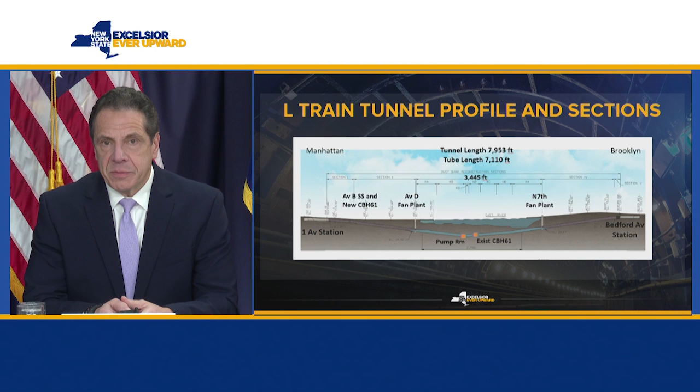The L train tunnel, as you know, it's about a mile and a half long. It's over 100 years old. It goes from First Avenue in Manhattan to the Bedford Station in Brooklyn. The tunnel goes from Manhattan to Brooklyn, 7,900 feet. The tunnel itself, 7,100 feet.

2012 Hurricane Sandy, which caused all of these issues. Gateway Tunnel, Hudson River Tunnels, Montague Tunnel, L Train Tunnel. What's the common denominator? It is the first time you had a tunnel that was filled with salt water. That does not happen. That has not happened. Queens Midtown Tunnel, Brooklyn Battery Tunnel, same thing. It's been an entirely new experience to have a tunnel filled with salt water. And that's what Hurricane Sandy did. And much of the reconstruction that we are now doing goes back to Hurricane Sandy.

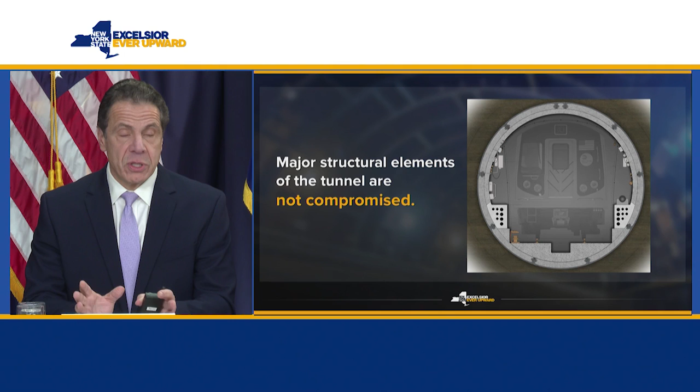The major structural elements of the tunnel are fine. There is no structural integrity issue for the tunnel itself. So people worry, is the tunnel going to have any significant issues? No. The structure of the tunnel is fine. The issue is the saltwater intrusion coming into the tunnel, which then made contact with the electrical components in the tunnel. And that is the problem. Salt water and electronics do not mix, period. It is a toxic combination.

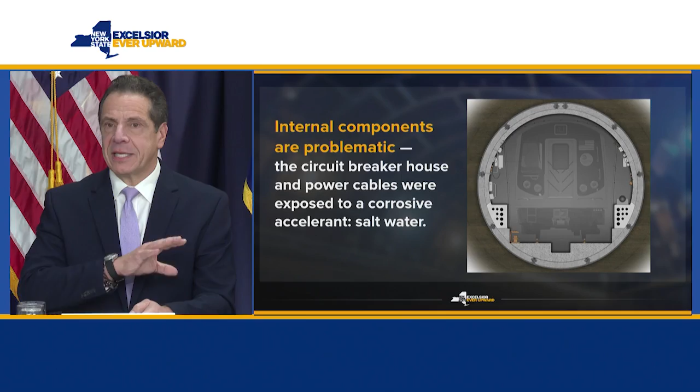And it's not that the water comes in and the water goes out and everything is fine and you dry it. The salt remains, and the salt remains in places where you can't get it out. So circuit breaker boxes and the power cables. You'll hear a lot about the power cables. The power cables are the cables that power the train. And they are very, very important. They were all exposed to salt water. That was an accelerant for the corrosion. That's what has created this entire situation.

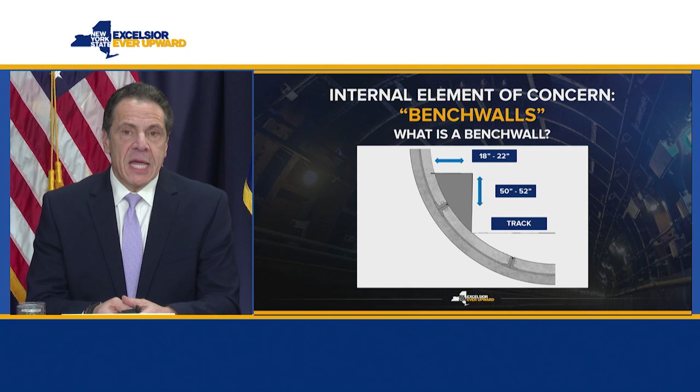You'll hear about the bench wall. What is a bench wall? The bench walls are walls that are on both sides of the tunnels. You can see them from a subway platform. It's where a worker would walk out into the tunnel. You walk along the top of the bench wall. And the bench wall often has a railing on the outside or on the inside. But it's the walkway that you walk out into the tunnel. The bench walls are about 2 feet wide. They're about 50 inches high, and they're all cement.

The bench walls also are very important for the power system of the tunnel, because the power cables are held within those cement bench walls. They are also practically a walkway for workers to go out and, in case of an emergency, access or egress.

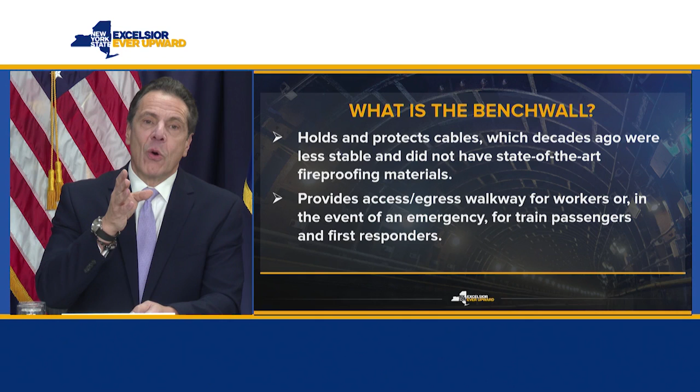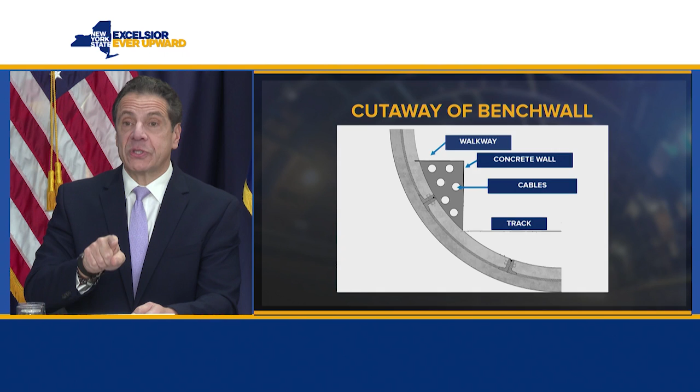Why did they put the cables in the bench walls? Because remember the initial design, this is 100 years ago, they needed fire protection for the cables, and the cement provided fire protection for the cables. So they literally ran ducts, pipes in the cement. Within the duct or the pipe, they ran the cable. And then they entombed it in cement, and all you see on the outside is the bench wall. So that is the bench wall. When you're riding in a train, you see the bench wall.

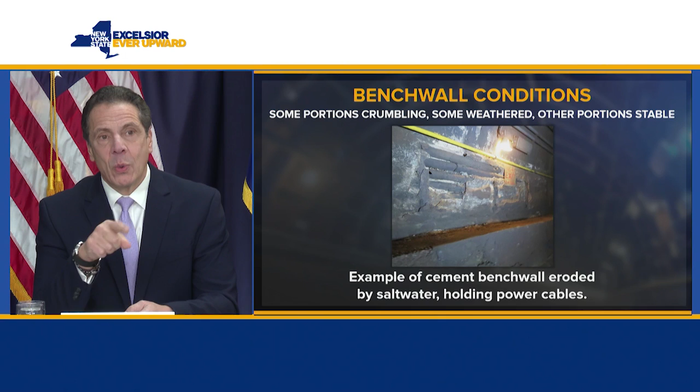This is a bench wall that is crumbling. The bench wall in the L train tunnels, in some places it's intact and fine. In some places it is slightly weakened. In some places it is crumbling. The places where it's crumbling are the places where the salt water was the highest and remained the longest, because the salt water got into the cracks in the bench wall, and the salt sat and deteriorated the bench wall. This picture, you can see the pipes in the bench wall. Within that pipe is the power cable. Okay? That's the way they did it.

The current plan was remove the entire bench wall, remove all the conduits, remove all the cables. That's 32,000 feet of bench wall between the two tunnels.

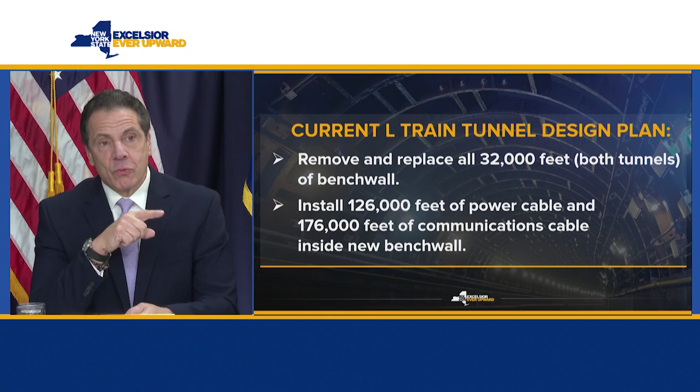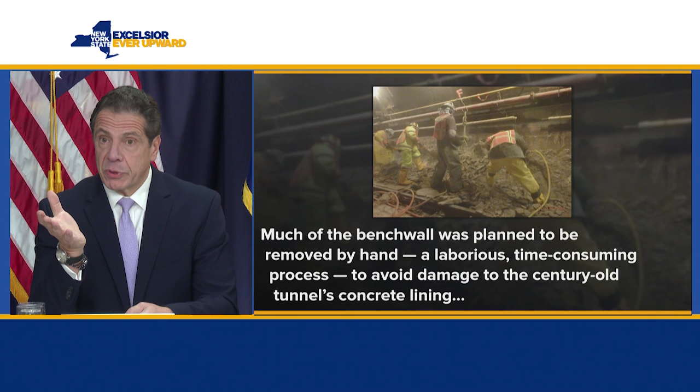Install all new cable, and then rebuild the bench wall. That was the plan. It was labor intensive because much of the bench wall had to be removed by hand. It's a 100-year-old tunnel. You're taking out a cement structure attached to the lining of the tunnel, so it would have to be broken up by hand and removed.

I'll start where I ended. I asked Columbia and Cornell to assist the state of New York as good citizens of the state of New York. They agreed. The dean of the engineering school of both Columbia and Cornell put together teams, went through the whole process, went through the tunnels, and I said to them, any new idea, outside of the box, creative, any way to reduce the 15 months, we are open. Let the MTA say that's an idea that just is beyond reality.

Or confirm that this is the best way that we can do it. So I have confidence in saying to the people of New York, this is the shortest, best route to the rebuilding of the tunnel. Again, I want to thank them for their work, because they did work very hard.

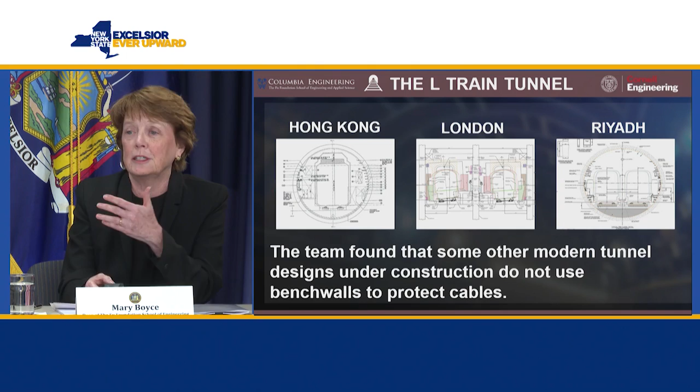But we have found that in newer designs, the cables are not placed within bench walls, right? Also, if you can get a little bit of a look at these tunnels' cross sections, you also see that there's a lot more space around the train in these newer tunnels, right? So that's also an important factor.

So let me start with the recommendations. So our recommendations, while we're going to go through them in a little bit of a linear fashion, are really a result of looking at a highly integrated system of bringing together emerging and new technologies from little bits and pieces from many different proven technologies that are out there.

And these have led to our primary recommendation that we recommend implementing a new way to do the power, control, and communication systems, and how to embed these in the tunnel. So the tunnel cross-section you're seeing here is the L-train tunnel cross-section. So within that, not to bore you with all the details, but as engineers, we can't help ourselves sometimes. You can see the cross-section of the train, and you also see this yellow envelope, and that's kind of the keep-away envelope, meaning that everything outside the yellow envelope and within the walls of the tunnel is the space that we have to work with.

So this is another challenge. It's a highly tight space, highly geometrically confined area that we get to work with. So you can see why cables are in bench walls in a tunnel like this, right? Because they fit, okay? And they get protected and all of the other elements that you've heard. But we said, let's not be confined by that. Let's think more broadly, right? So I'm going to focus first on the cables, and then I'll hand over, and Dean Collins will talk about the details in the bench wall and others.

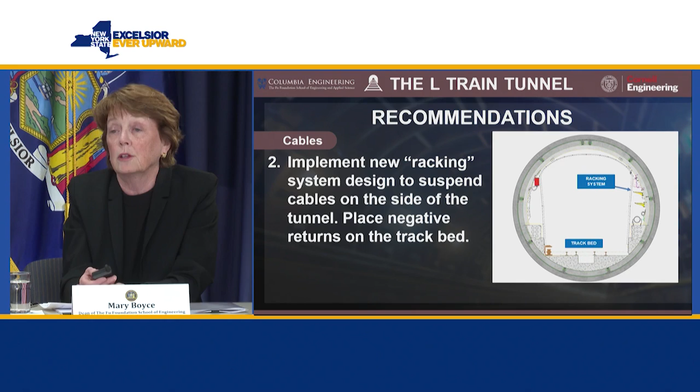So what this is essentially doing is decoupling the cable system from the bench wall, right? These are two different functions. We're able to execute all of the functions of the cables without them being in the bench wall. So we do not give up or sacrifice any functionality of the system, right?

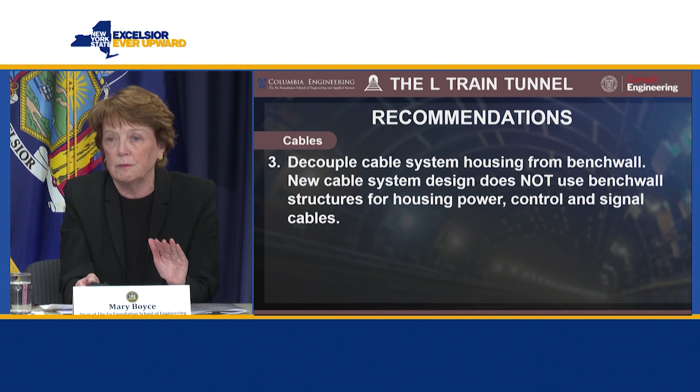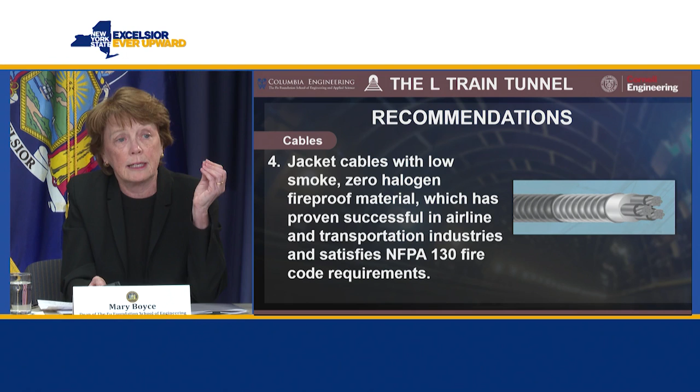An important thing that we have to address is making sure that the fire retardancy is still possible for these cables. So the cables must be jacketed, and they're jacketed with a low smoke, zero halogen, fireproof material. Okay, and this is a proven technology. It has been used in newer modern tunnel systems. It's also used in aircraft, right? And so what happens with these jacketed cables is that yes, there's some sort of thermoplastic or thermoset, but they have an inorganic filler so that they char in the presence of heat or fire, and so there's no outgassing, and they actually become even better insulated. So this is another key feature of being able to rack these cables on the wall and not embed them in the bench wall.

This also very importantly means that we can abandon all the old cables in the bench wall, right? We do not need to remove them and replace them. We just leave them there. So if a bench wall is still structurally sound, we do not need to destroy it and remove the cables and rebuild it. Okay? This is a very key factor, because it significantly reduces demolition and construction, and we feel probably has a cost implication as well. I'm going to now hand this over to Dean Collins, who will talk about the bench wall.

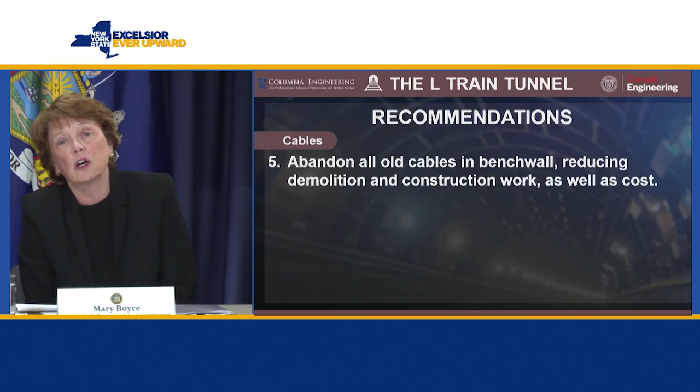Thanks, Mary. Let me also add my thanks to the governor for giving me an opportunity to work on this project. This has been an incredibly exciting 3 or 4 weeks that we've had a deep dive and have learned a lot about the Canarsie Tunnel.

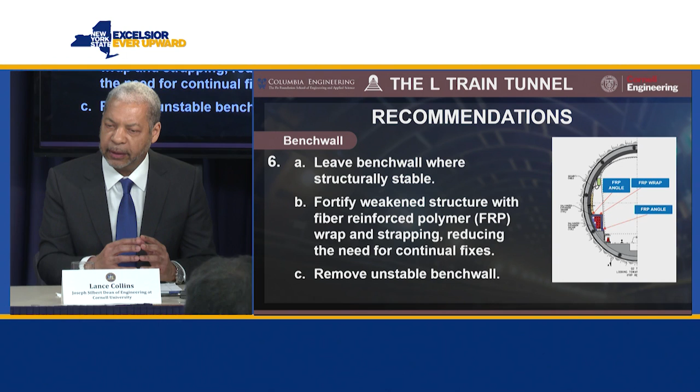So I'm going to pick up the conversation from where Mary just left off and talk a little bit about the bench wall. As the governor mentioned in his opening remarks, we're going to place the bench wall into 3 categories. So there's bench wall that's going to, in some sense, be stable and will remain. There's bench wall that's been compromised to some degree, but not significantly, that we think we can reinforce using something called fiber reinforced polymer. So it's essentially a mixture of epoxy and fiber to wrap around.

And if you look at the figure to the right, you'll see essentially wrapping it around the bench wall and strengthening the bench wall. This will last for decades, for a long period of time. It's not a quick fix. It's technology that's been widely used in bridges, in buildings.

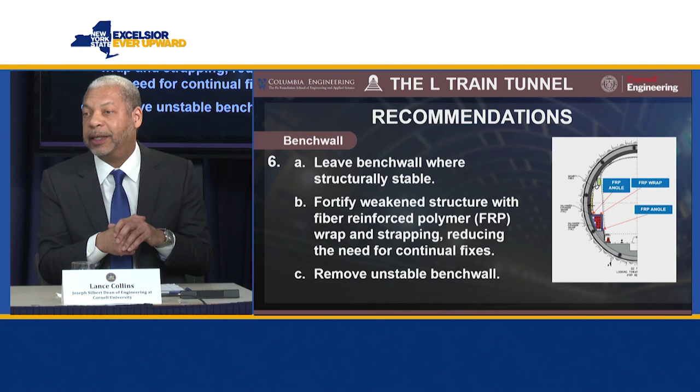So we're simply applying it in a very different application here. And then there's a third category, which is bench wall that really is just not structurally sound, that has to ultimately be demolished and removed.

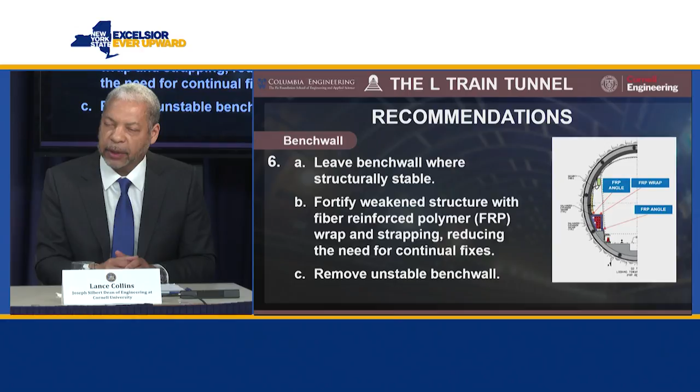Then the question becomes, how do we know what's what? And so we're going to use a state-of-the-art ultrasound technology to evaluate the entire length of the bench wall and figure out which parts of the bench wall are in which categories, and then act accordingly to either leave it as it is, or to reinforce it as needed, or remove it as needed.

And what's important is that the bench wall is really serving the primary purpose. It's back to its primary purpose, which is access and egress. It's no longer serving any role with respect to the cabling, and so that's the only element that we have to ensure in terms of functionality that we have retained.

In addition to this, one of the concerns that you have is, well, the bench wall at one period of time may be in one state, but it may deteriorate over time. How will you know if that's happening? And so, in addition, we are going to install smart fiber optic sensors. It's a fiber optic cable that will run along the vertical side of the bench wall, along the length of the tunnel.

And these sensors will be able to pick up small changes and deformations in the bench wall in advance of failure, so that if there were something that eventually is going to fail, we'll know that in advance and be able to send in a team to do whatever's necessary, reinforce that section as needed in advance of the actual failure. So this is really state-of-the-art technology.

It's been applied in new tunnels. This is an unusual application in that we're applying it as part of a rehabilitation of an existing tunnel, but it's proven technology. And so I think that the fact that it's proven technology means that it will work beautifully here. But we're not going to just stop there.

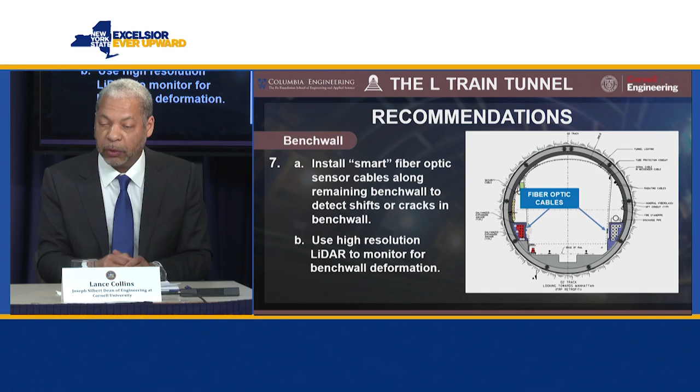But it would add a second and complementary evaluation of any sort of deterioration that might be going on within the tunnel. So with these two pieces of technology, we think we will be able to know in advance if any section of the tunnel is showing signs of deterioration, and be able to head off any more significant things that might happen, for example, if there were structural loss into the actual train area. So both of these are, as I said, state of the art, but on the other hand, proven.

And I'll just mention that this is the baseline of what this technology can produce, but there are constant advances going on with the technology. Once deployed, we will continue to try to get more and more additional information from the signals coming out of those cables. So, for example, the cables can pick up vibration.

So as trains are going by, we would be able to see if the vibration signature has changed over time. And that may indicate problems that may be going on, not in the bench wall only, but also in the track system. And so there are not only the immediate benefits that we see happening, but in fact, over a longer period of time, and as the sophistication of this technology grows, even higher level understandings about the operations that are going on within the tunnel.

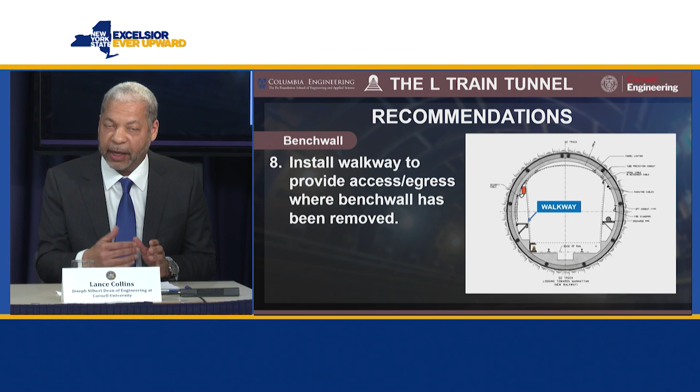We also looked very carefully at the resilience. As bad as Sandy was, it's not the last storm that New York is going to experience, and so we wanted to make sure that the tunnel is more resilient than it was before. We're making 4 recommendations to improve the resiliency of the tunnel.

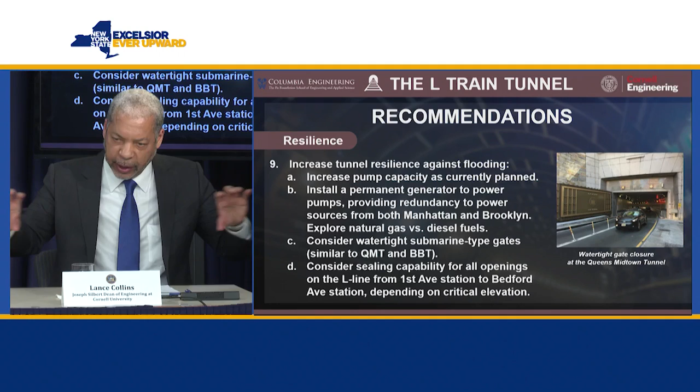The first is that we want to increase the pump capacity for the tunnel. As it currently stands, there's a single drainage pipe. And we will now have drainage pipes that will run to the Manhattan side and to the Brooklyn side, so that we can double the amount of water going through those pipes. In addition, we've increased the pumping capacity of the standard pumps and of the emergency pumps to dramatically increase the amount of water that can be pumped out of the tunnel under an emergency situation.

The second thing is we looked at how those pumps are powered. Obviously, they only run if they're powered. And so there are utility lines that are going to run from Manhattan into the pumping station and from Brooklyn into the pumping station, providing one level of redundancy. So if one of the grids goes down but the other grid is up, then the pumps continue to run. In the event that both of the utilities go down, though, then you need to think about an external generator to provide that power. So we are recommending that a permanent generator be installed.

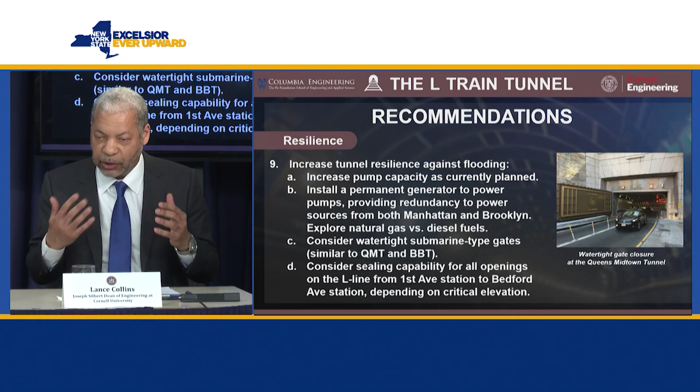Moreover, we would like to explore the option of possibly powering that generator using natural gas rather than diesel fuel. The advantage of having it powered by natural gas is that the emergency generator would be able to run indefinitely, so it would not stop running as it would with diesel fuel when the tank ran out. And of course, under the conditions we're talking about, a major storm is hitting, there's a lot of things going on at the same time, and so the notion that this external power would be there indefinitely would certainly add to the resilience of the tunnel.

Third, and there's a demonstration of this shown here with the Queens Midtown Tunnel, consideration should be given to potentially putting a watertight gate on the 2 ends of the tunnel to protect the tunnel from any sort of major flooding. So I'm showing an example here in front of the Queens Midtown Tunnel. The Brooklyn Battery Tunnel has something very similar, and so there should be some consideration given to that. So that's our third recommendation.

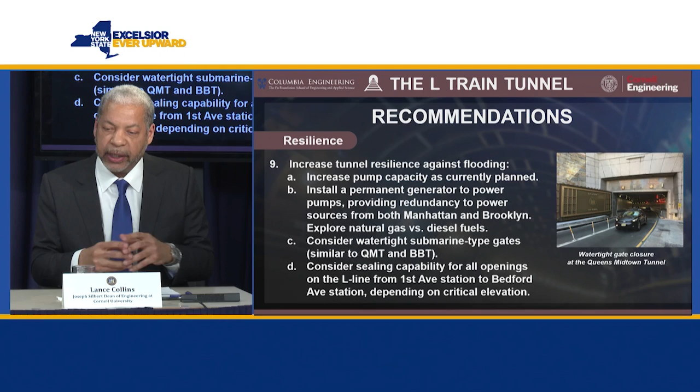And fourth, there's a lot of vent shafts and so forth that run along the entire length of the tunnel. That's where the water is going to get in, and so we're recommending that for all of those openings, some sealing capability be built into all of those between the First Avenue station and the Bedford Avenue station, especially all of those that are under some critical elevation. And so that should be something that's examined and implemented as needed.

And finally, I just wanted to point to the fact that public safety was always in our mind. It was in every conversation that we had. And there were really 2 aspects of it that we discussed at some length. One had to do with the actual construction project, and one had to do with the operation of the tunnel after the construction.

So during the construction, the demolition and removal of the duct banks is going to generate a good deal of dust, and importantly, airborne silica, which is a hazard for humans. And so part of what the construction company will have to do is monitor that and ensure through filtration and remediation that the air has been cleaned before that tunnel could then be reopened. So we made an additional recommendation beyond just having the company itself monitoring: there should be an external independent evaluation and monitoring of air quality, as public assurance that the air quality is in fact as needed.

And then in terms of the ongoing operations of the tunnel, as already mentioned, we're recommending this smart technology be introduced. This will monitor the structure of the tunnel. This is in some sense raising the quality of safety within the tunnel even beyond what it is today by introducing this technology.

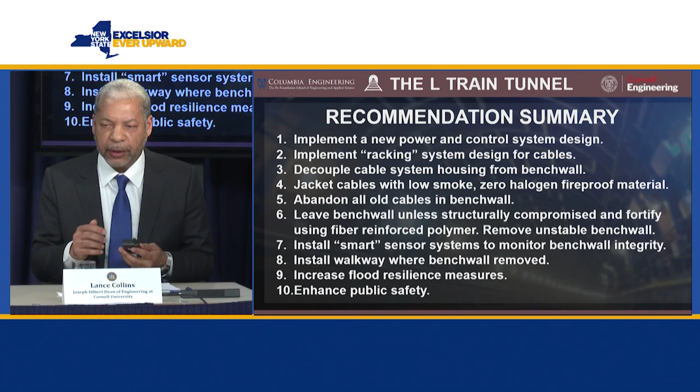So we start with a new power and control system, as was stated, and in fact implementing a racking system for hanging the cables outside of the bench wall. This decouples the cables from the bench wall and allows us to then treat the bench wall in a somewhat simpler way, and not comprehensively remove all of it, but in fact only remove that portion that is needed. We want to jacket the cables with a fireproof material that is also low smoke, so that in the event of a fire, people are safe.

We'll abandon the cables that currently exist within the bench wall. There's no environmental concern there. We will leave the structurally sound bench wall in place, reinforce the less structurally sound bench wall, and remove the unstable bench wall. Number 7, we'll install a smart sensor system that is state-of-the-art to monitor the structures initially, and ultimately, I believe, the operations within the tunnel.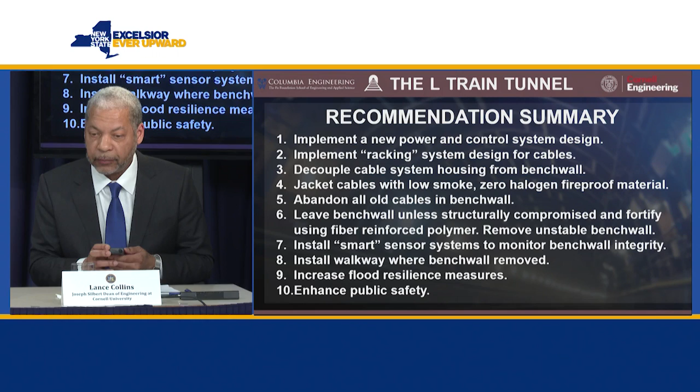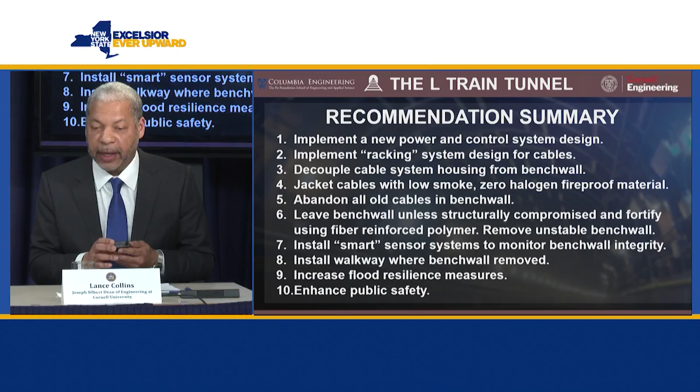8, install a walkway so there continues to be a pathway for access and for egress under emergency conditions. 9, install and improve the resiliency of the tunnel in terms of any future storms that may be coming along. And 10, as I mentioned, we always had public safety in mind as we went through this exercise.

So to quickly summarize the benefits from this, first we see that the new system design is a highly integrated design, and it achieves all functional outcomes. And at the same time, it's reducing the work, because it allows simultaneous and not sequential execution of the critical elements. Importantly, because we are racking the cables, the old cables remain functional while we're actually placing the new cables. And this is an incredible process change, which is what leads to the outcome of no closure, which was prompted by Governor Cuomo.

The racking system allows greater access to the cables for inspection and future upgrades. So as newer technologies arise over the coming years and decades, we will be able to replace and upgrade much more easily than if these were embedded within a bench wall. The installation of the smart sensor system allows for the monitoring of the bench wall, but also, as you heard, other aspects of the tunnel and the train system on a continuous basis. This is actually helping usher in the era of big data as part of monitoring and knowing what's happening in our tunnels. This will create a state-of-the-art capability here in New York.

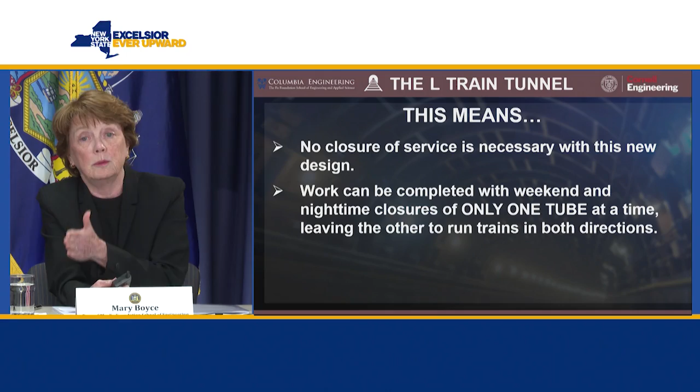I'd like to further emphasize, this has been a highly collaborative process. We've benefited so much from work that was done before, but also so much from the collaboration over the last 3 weeks with our partners, the consultants from WSP and Jacobs and from the MTA. We have presented this to the MTA, and we feel confident that they will be able to implement this, and I think we'll be hearing from the MTA next.

Maybe before we move to the MTA, if you don't mind, I'll turn it over to my colleagues in a second. I just wanted to add my thanks to all of the MTA and the consultants. In 3 weeks, I don't know how many dozens and dozens of questions we asked, it's literally hundreds.

And we can say these words, the kind of high level statement about putting up racks and hanging the wire, but what you really have to do is do that along the entire length of the tunnel, and there are tricky areas that have to be worked around, and there were lots and lots of questions. And I was incredibly happy to see their willingness, day, night, weekend, Christmas Day, New Year's Day, to lend a hand to help us understand a particular issue. And so it just seems appropriate at this point to say a genuine thank you to all of them.